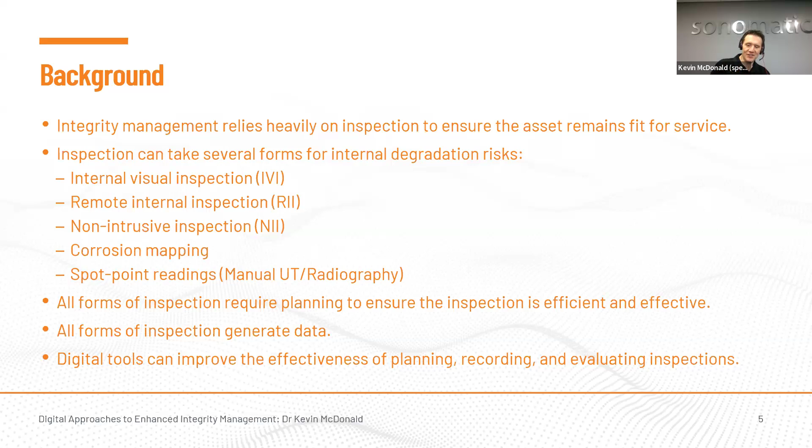From what we see, that often doesn't meet the needs of an inspection. It's that old cliche of not seeing the woods for the trees. There's just too much information thrown at you when you're looking at an entire asset twin. So therefore, we tend to focus on a mini twin for a single component to enhance inspection and integrity management.

Just an example of that. So I've got two examples here. One of a pressure vessel, one of a pipework circuit. Just the types of things we always create when we're doing any kind of inspection activity or inspection planning for that matter. So we've got a pressure vessel on the left, which has got some inspection data on it, and then on the right hand side there's a pipework circuit.

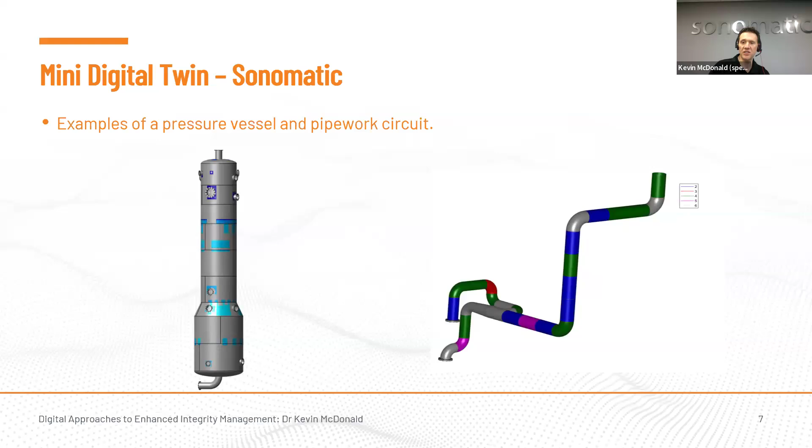The legend's perhaps not very easy to read, but this has been segregated into individual spot point measurement locations, and these have been coloured by the number of previous inspections that each of these has seen. So, for example, 4 is green. Anything that's grey has not seen any inspection at all on this particular circuit. But as I say, that's just an example of the types of models we do create, just as a flavour for the remainder of the talk.

So moving on to one of our specific topics on this. So first of all, I'm going to talk about NII, but I want to just make clear what I mean by that, because we still see that the terms NII and NDT are used quite interchangeably a lot in the inspection industry. So when I talk about NII, it's one of our core services, and it's a 4-stage process which is applied to pressure vessels with the aim of either deferring or replacing an internal visual inspection.

So I mentioned the 4 stages. So there's an assessment to determine if a vessel is suitable to have NII applied, which, as I said before, is just an externally applied inspection to verify the internal condition. Assuming the vessel is suitable, a work scope is then developed with a specific set of criteria that the inspection must meet, and the vessel is then inspected. And then finally, there's an evaluation phase, which will assess the inspection results to ensure the inspection criteria were met.

There is a recommended practice which has been written to govern this process. In essence, this was first published in 2007 by DNV. The latest version went live in February 2020. And as Neil mentioned at the start, I was one of the authors of that recommended practice.

So just as a slightly more expanded overview of what the process involves. As I said, there was an assessment phase initially, in which we will review the operating and design parameters of the pressure vessel and the inspection history to determine if it's suitable for NII. If that is the case, we would then define the key inspection requirements in terms of both coverage and the most representative locations for inspection of the vessel given the degradation risks, and also define the appropriate inspection techniques that are most suited for the vessel and the degradation risk associated with that.

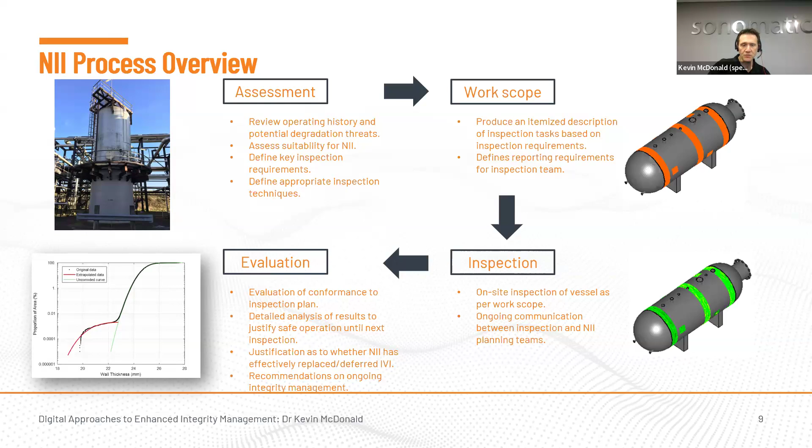So we've got an example here of the type of model that we'll produce of a vessel for doing an NII. 3D models are used throughout the whole process, primarily because of ease, efficiency, and consistency at all stages. We can just create the model, deploy it with the inspection team, and they hand it back to us once that inspection has been completed. It makes life so much easier for everybody.

In addition to that, NII does provide a cost-effective alternative, but can generate substantial amounts of data, particularly if it's a high coverage requirement for a vessel. I've got an example later in the presentation of a vessel that's got a lot of data on it, and you'll see just the sheer volume that is generated. And that all needs to be housed somewhere as well. So it's much easier to have it on a model so we can easily see where each scan has been completed, and it's much more simple for everybody in terms of visualization, particularly if there's any degradation that has been identified.

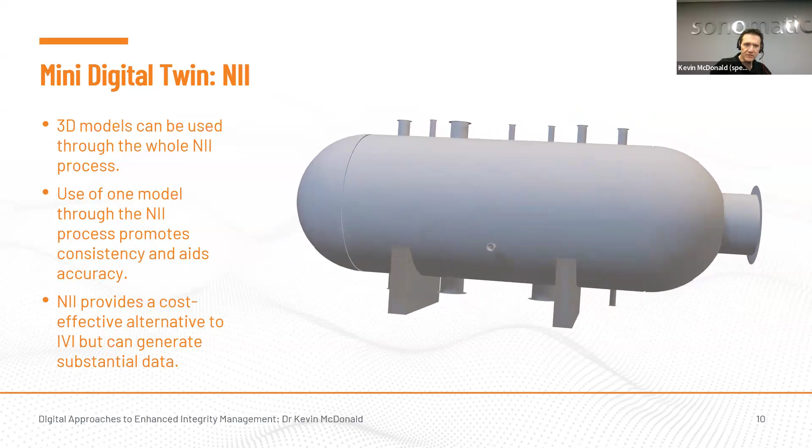But in terms of how these digital tools can aid efficiency of the NII process itself, I mentioned one of the things we do is review the inspection history. Within our digital tools, we can visualize that as a timeline, which, as daft as it sounds, can be a massive help for all stakeholders in terms of understanding exactly what the vessel has seen.

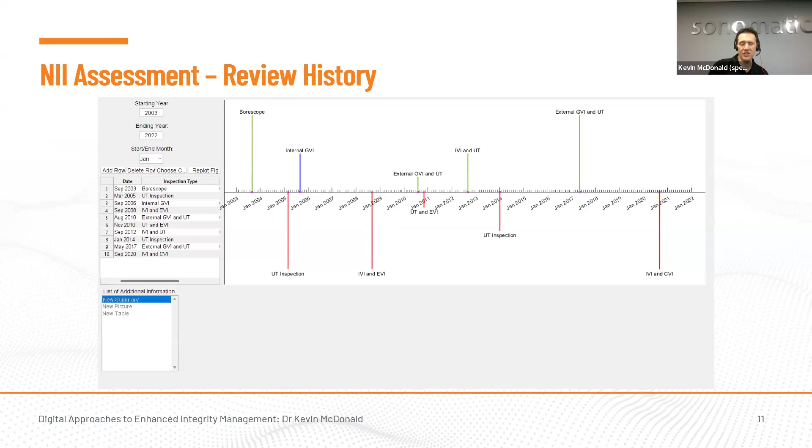In terms of previous inspection, that obviously doesn't just have to relate to pressure vessels. We can produce this for any component, but for the purposes of this example, this is an inspection history from a pressure vessel. So you can see there's been a number of different inspections. It's had some UT, internal visual inspections, borescope, for example. So it's just a much more simple and efficient way of representing the history in a single snapshot for all stakeholders to easily capture the overall picture.

We also use it to mark up the various zones of the vessel, primarily with an ease of reviewing the threats that are applicable. We can mark up the vessel in various zones in terms of what each zone is seeing. So for an example here, we've got liquid zone at the bottom, which is constantly wetted, which would be an area that would need to be targeted by inspection.

In addition, this vessel was also clad beyond a certain point, so we can mark up where the cladding is present too. That would require a slightly different inspection technique to be deployed, and may require slightly different coverage level too, depending on the specific cladding that's in place. But overall, the reason that we do this is just to, again, make life easier and everything clearer for everybody who's going to be involved in the NII process, both in terms of us and the client.

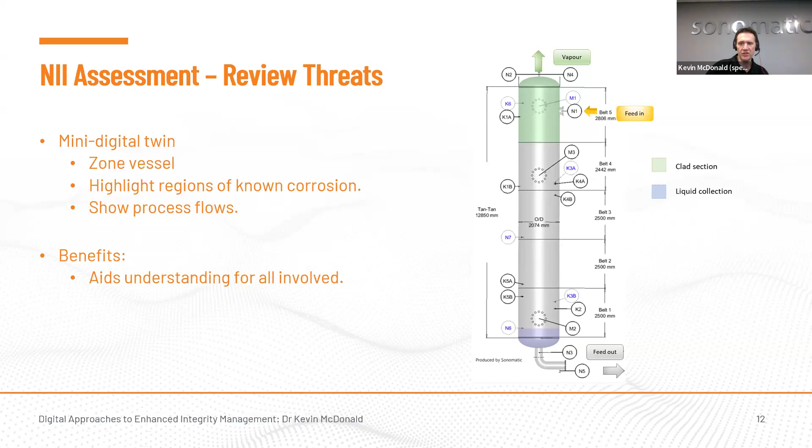And we can show the process flows, so that may highlight or guide us to where any areas of concern may be. Similarly, if there's any areas of known corrosion, these can also be marked up in a drawing such as this to, again, illustrate areas that we need to be targeted during an inspection campaign.

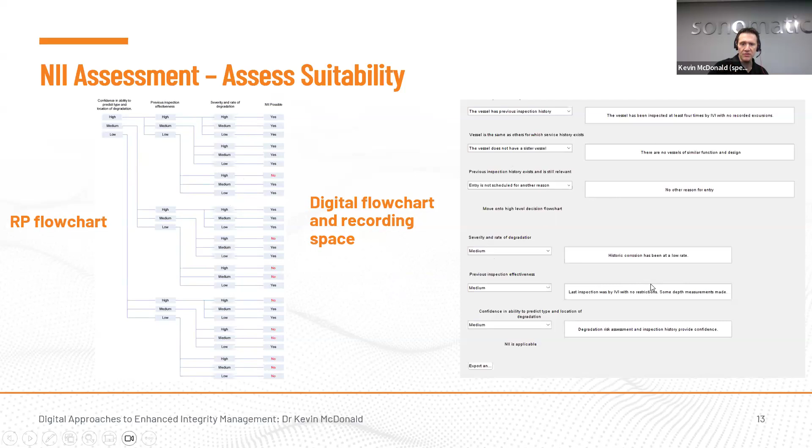I mentioned the work scope earlier, so moving on to that. So as I said, we try to be as detailed as we can when we're putting together work scopes, so that they're as clear as they can be to the inspection team. It is important that each item is achievable. Sometimes that isn't the case, but again, access when you get to a platform, for example, could be heavily restricted that we just don't know about. Maybe it wasn't captured in photographs, for example.

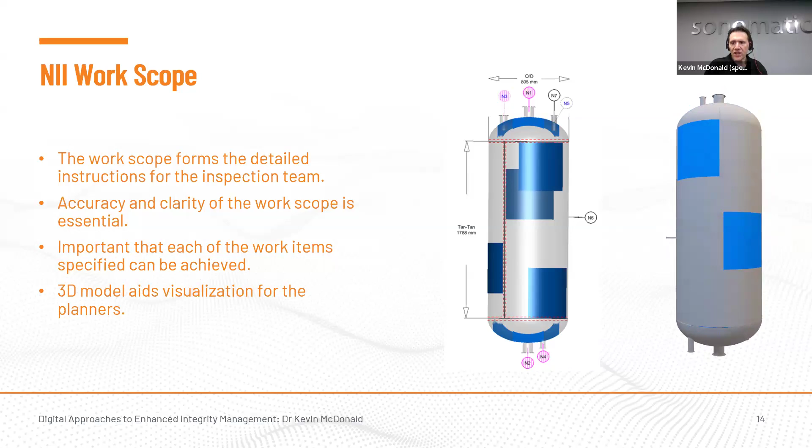But we would always mark up areas on a model to illustrate where the areas of inspection that we would like to see are located. As I say, there are times when those can't be captured for multiple reasons. But again, it's just a very good visual tool to represent the areas of inspection that are required, for both our side and the client side, because we can hand this over to the client who then can go off and say, for example, there's a walkway that hasn't been captured on the model that could be used to gain a higher elevation and therefore make life easier for the inspection team. Similarly, they could also tell us that access is heavily restricted at one location, and we need to consider an alternative.

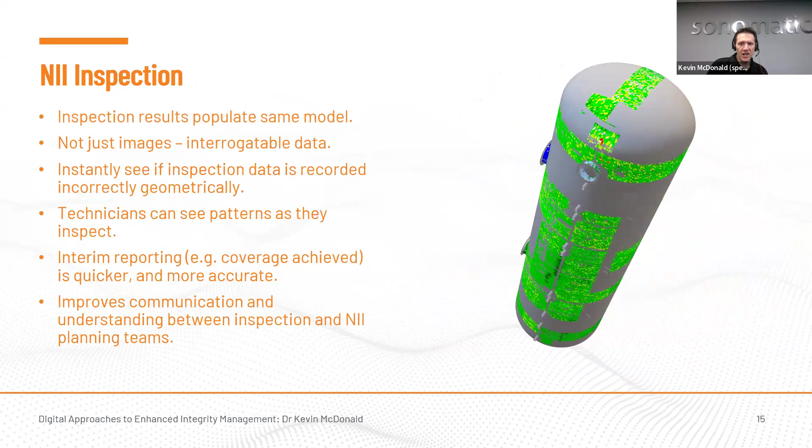So once the inspection team is deployed on site to perform the NII inspection, these inspection results will all be populated on the same model that was created in the initial stages during the assessment and work scope phases. One thing I do want to stress here is that the data that's uploaded onto our models isn't just composite images of numbers. It is interrogatable data. So in other words, it contains the waveform data that was captured during the inspection campaign. So anyone could go in and assess the data at any point to double check anything, for example, or if they would like to reanalyze it in more detail for whatever reason, that can be done. It's all done within our digital framework.

There's a number of additional benefits to that. So we can instantly see if inspection data is recorded incorrectly in terms of geometry. So for example, if you're inspecting around a nozzle, and that shows up somewhere that you weren't expecting it to when it's uploaded onto the model, that's very easy to change at that point. The technicians can also see patterns as they're inspecting. So if they see anything of concern, it's very easy to visualize that immediately, and they can make adjustments to the inspection area immediately if necessary. It makes life much easier and quicker for interim reporting.

So in other words, just specifying what coverage has been achieved and any initial minimums that have been found. I say initial because we do provide interim reports while the technicians are on site, but they're just indicative values; they're not fully confirmed until they've done a full in-depth data analysis once they're back on shore.

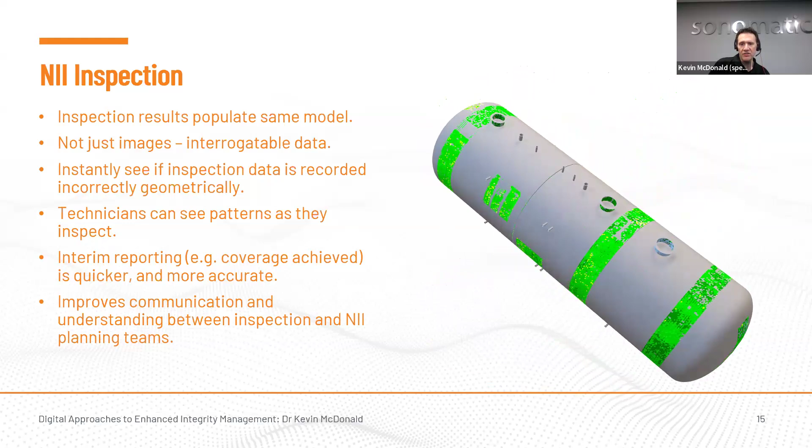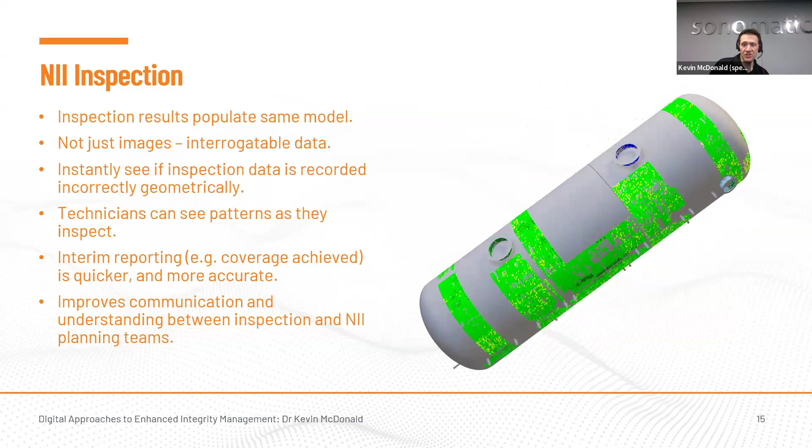And finally, I see improved communication. It helps communication and understanding between the various teams, primarily because if the inspection team finds something, they can very easily just point it out to us on this model. Similarly, if they get on site and they discover that they can't inspect a certain area for reasons that weren't picked up in advance, for example, maybe the surface is worse than initially thought, they can again just specify this is an area that we cannot get, and they can suggest an alternative, or we can suggest an alternative and move it for them. Again, just to make everything more efficient for everyone.

So finally, the evaluation phase. It's one that's often forgotten. Very often clients do it themselves, but this is a very important phase to the NII process because it's the justification of not doing the internal visual inspection, or rather, it's the justification of using the results you have got in lieu of your internal visual inspection.

So what the NII evaluation will do is review the conformance to the initial inspection plan in terms of: was the correct coverage achieved, were the correct locations achieved? If they weren't, were suitable alternatives taken instead, and was the correct inspection technique achieved? And what I mean by that is, was a technique with a suitable probability of detection used? And if not, how large was the difference? With a view to doing a detailed analysis to justify operation until the next inspection.

So in other words, whether or not the NII has effectively replaced or deferred the internal visual inspection or not, as the case would be, which does happen sometimes. And again, as I mentioned earlier, we can also make recommendations in terms of ongoing integrity management that may be required.

So the crucial thing here is the digital twin, again, just makes the data analysis quicker and more efficient. The inspection data, as I've shown in previous slides, is all uploaded onto the 3D model. We use all the data from the inspection campaign. We don't just look at minimum values. We can also collect data from different zones. So, for example, as I mentioned earlier, if there's a liquid zone in a vessel which is showing behavior markedly different to the remainder of it, we can very easily just gather those scans together and treat them in isolation, in effect, because they're behaving differently.

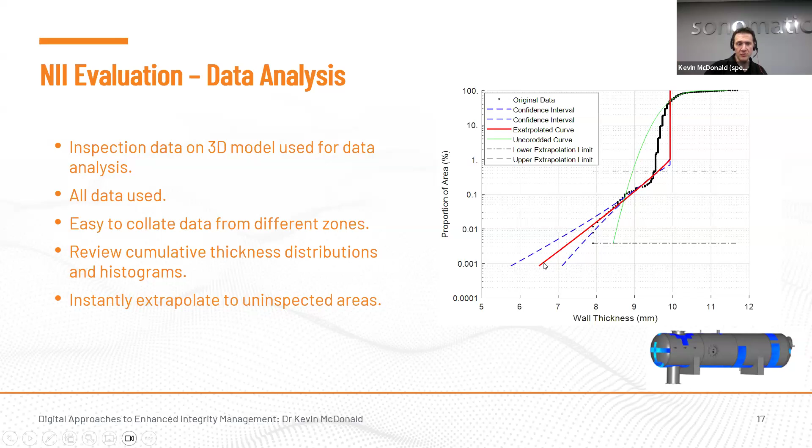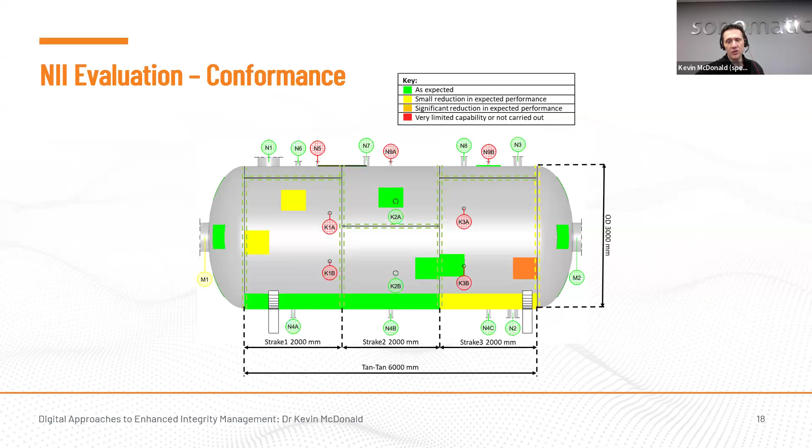And as I say, the use of a digital tool just provides a very quick, easy overview for everybody, all the stakeholders involved, of the overall outcome of the inspection campaign.

I've got a video / GIF here just to illustrate how we have a software that, in essence, pulls all those stages together. The software is called SIMS, which stands for Sonomatic Integrity Management Software. So in the top right here, you've got a number of components for the vessel. So there's several strakes, there's domes, there's nozzles, there's supports here, which are listed too.

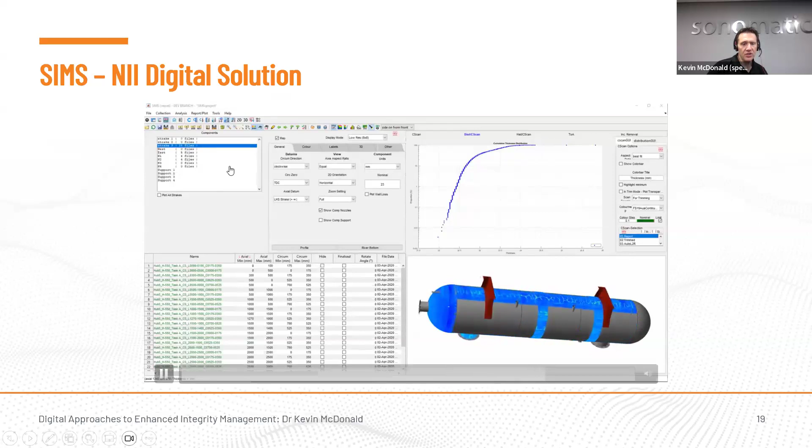So we can swap between each of these, and then in the bottom left, these are all the data files for that single strake. They are at a specified location in terms of an axial and circumferential position. If I was to scroll right, which I can't, you can also see the minimums that are associated with those, and a number of other parameters as well. And then there's also thickness distribution shown in the top right.

Again, this is just to illustrate how the data is behaving. This is much more what's called a normal distribution, for anyone who doesn't know what these represent. So it's a much more smooth reducing curve, and that's a very classic sign that corrosion is absent from the sample. The reason this is included is because, if it's behaving in a manner like the plot I showed previously, it's a very easy way to spot something different happening within an inspection data sample.

So in other words, if corrosion is present and perhaps not being seen due to choice of color scale, or it could be quite isolated. On a large vessel, it's very difficult to spot a small pit with the naked eye, but in terms of how it can be visualized using a distribution such as this, it's very easy to represent that.

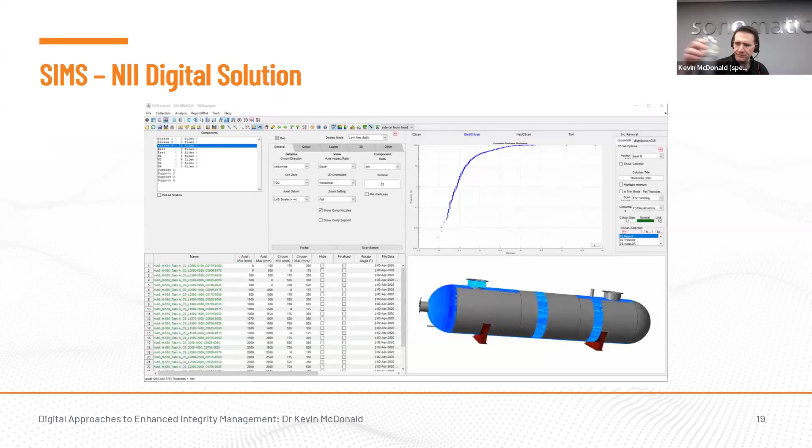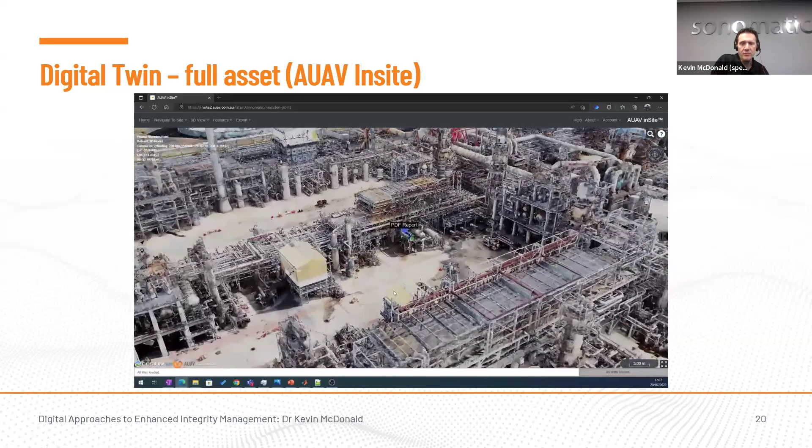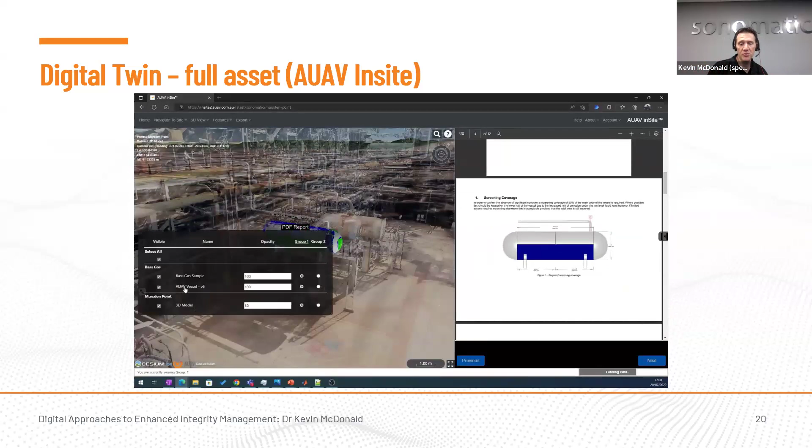Before I move on from pressure vessels, I mentioned at the start we tend not to consider a full asset model, but I just wanted to illustrate this before we move on. One of the sister companies owned by our parent company is a company called AUAV, who are essentially a drone inspection company. They can take a series of photographs and stitch those together to produce an entire asset model. We can tie into that using a platform called Insite, which is AUAV-specific software, to superimpose various things on a pressure vessel model within that platform.

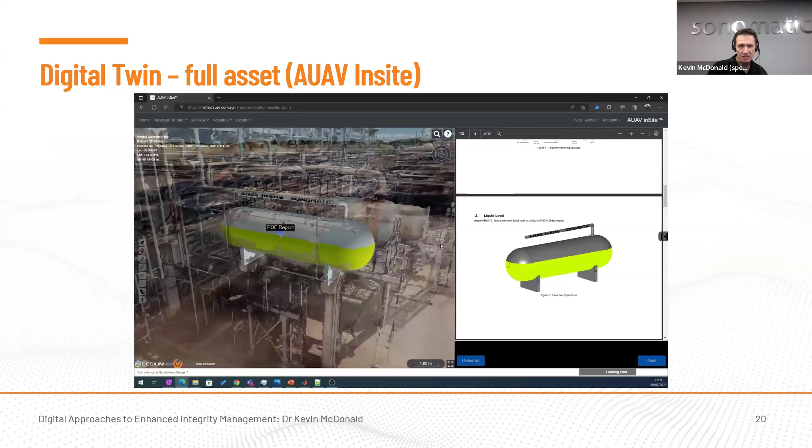So at the start, there was inspection data, which is overlaid. Now it's been swapped to the inspection work scope. And now this is the liquid level of the vessel. And on the right-hand side, you'll see there's also an inspection report which has been tagged to this vessel, which can be navigated and viewed alongside the vessel in this platform too. And there is a statistical distribution included in that report.

Beyond that, we can essentially flatten the photographs to view the model in isolation. What's being shown on the screen at the moment is adding a particular area of interest and making comments associated with that too. So, for example, if there's an area of pitting we want to highlight, we can mark that up on the model and make comments to that effect. We can also append PDF reports or images to this too.

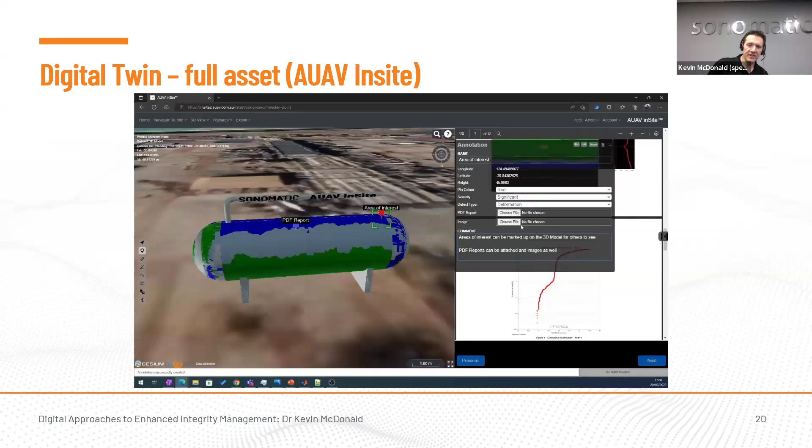And then finally, what it's about to show here is we can also add measurements to the vessel. So if there's an area of pitting, we could just add a measurement to that. What's going to be shown here is just the overall tan-to-tan length of the vessel. But again, it just serves to illustrate that we can also append the model further with other relevant pieces of information. And from memory, that's where the video ends. Yes.

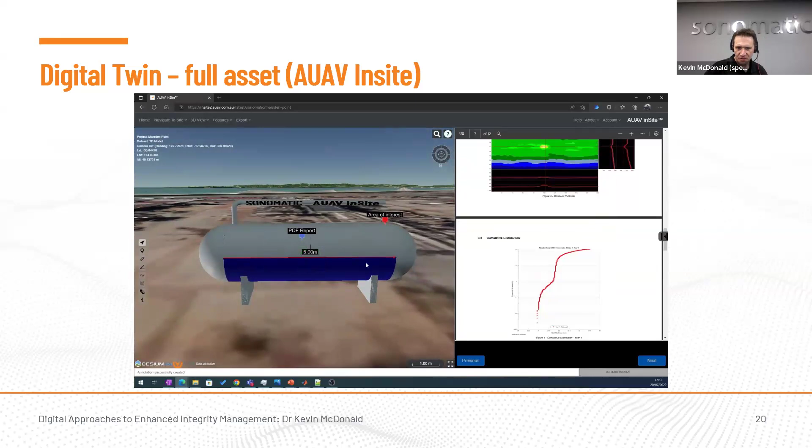So moving on now to pipework data trending. I mentioned at the start, I gave a presentation 2 years ago on our data trending methodology. I won't cover it again here; I won't bore everyone with it again. But as a very brief overview, we have developed a methodology for trending on spot point pipework readings, primarily because we accept that measurement error will happen over time. So trending over a longer term mitigates that as far as possible.

It also gives recognition to the statistical sampling principles at play when any kind of inspection, particularly low coverage pipework inspection such as this, is taking place. So it's basically taking what you feel is a representative sample of a pipework circuit and making decisions based on that. The differentiator in terms of what we do is we can identify groups of points within a pipework circuit that are behaving in a similar manner.

So, for example, if dead legs are behaving one way and thicker materials behaving another, we can very easily treat those in isolation and come up with tailored approaches for each of those groupings.

We also use information on historic corrosion coverage, in other words, how widespread corroded material has been in the past, all with a view to producing more representative corrosion rates, either for a pipework circuit as a whole or for various subgroupings within a pipework circuit, with a view to feeding that into a more efficient inspection planning process. Are areas being over or under inspected? Should some be seeing more focus than others, for example?

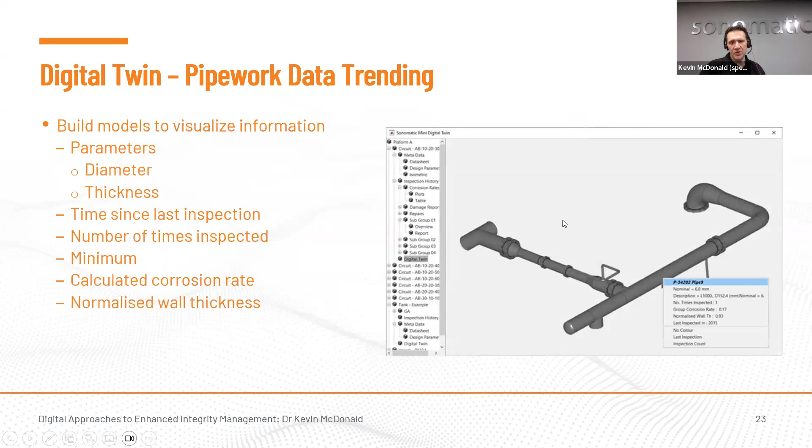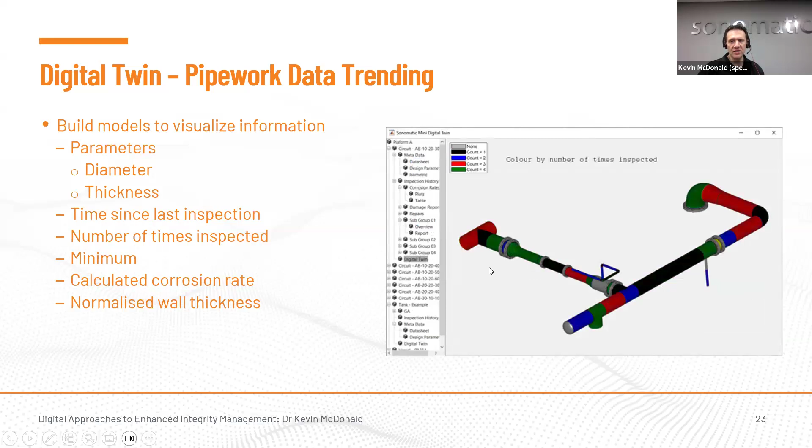As these things jump around, you'll see the part of the tree that's being highlighted jump around, and you'll see pressure vessels and other pieces of inspection information within this too. But as I say, it just serves to illustrate the ease with which we can navigate through this using a digital format. Again, just to make general understanding much more efficient.

So moving on now to data processing and management. When we do an inspection, a digital twin will house all of our inspection data. We've got a number of algorithms and other additional features to aid in data processing in order to deliver maximum value from inspection campaigns. I mentioned a number at the start here.

Corrosion detection, in other words, algorithms can determine external versus internal corrosion. I mentioned all these already, but coating correction, batch processing, automated reporting, and additional analytics. I'm going to cover each of these in a little bit more depth now, just as a larger illustration as to how this all hangs together.

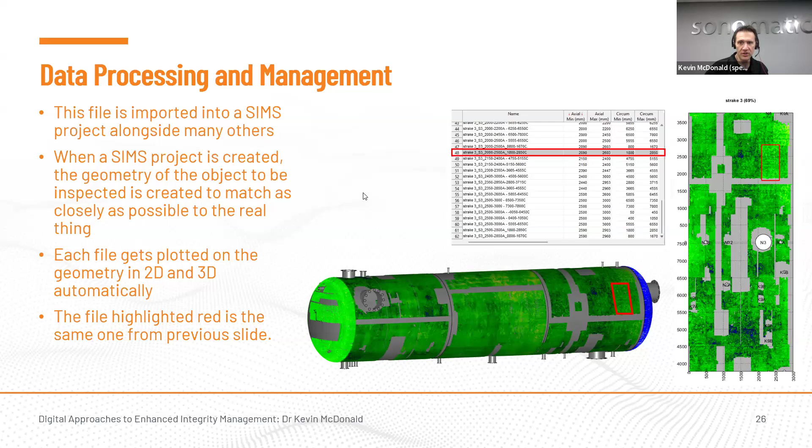So, for example, you can see there's a number of different areas missing on this vessel. This was due to walkways, and then there was an obstruction on the end here, for example. But again, this is just how the data is housed before and during processing stages.

So when processing on the previous slide, in other words, when we're performing an exercise such as this, we do have algorithms which will search. I jumped back a little quickly, but it does say, as I've said, from left to right and from right to left. So in other words, our algorithms will search along this direction and in this direction just to search for any very subtle changes in the signal response, because that can give a very good indication, particularly in the interface signal, which is the first one, of how the degradation manifests in terms of internal versus external corrosion.

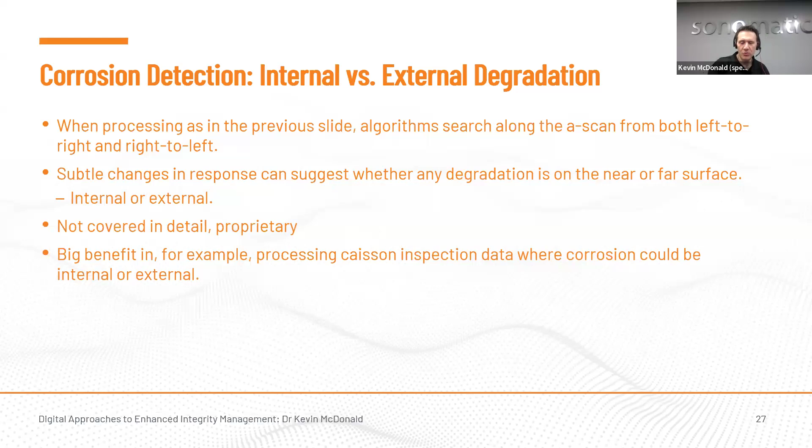I can't say exactly how it works, partly because it's proprietary, secondly because I'm not software savvy enough to explain it in enough technical detail. But we have been asked, well, what's the point if you should see if there's external corrosion versus internal corrosion? While that is fair, a lot of the time we do, for example, caisson inspections where we can't see the external surface. We're just sending a tool down a pipe. So in that case, that does become much more valuable, and also in, for example, subsea inspections, we can make a much more informed opinion, I guess, on whether degradation was internal or external.

So our algorithms can also account for varying coating thicknesses between repeat inspections. Generally, that can be processed out. Sometimes it can't be. And I've got this best illustrated with an example, which I'll come to in a second. But the reason for this is to calculate the most accurate growth rates, again, for input into integrity management decisions. Because sometimes, for example, in the example I've got, it could have resulted in a larger headache than was necessary for the client. But just to set the scene for this example.

So there was a repeat inspection done by a third party on a critical item, which had significant internal corrosion, and the requirement was to determine whether corrosion was indeed active or not. Between the two inspections, new internal coating had been applied, which meant the repeat inspection resulted in significantly thicker readings. The client asked the inspection company to comment on that, and they said they had processed the coating out and therefore couldn't understand why the readings were thicker. To be blunt, the client didn't believe them, so they asked us to investigate to see what our thoughts were in terms of the variation between the two inspection campaigns.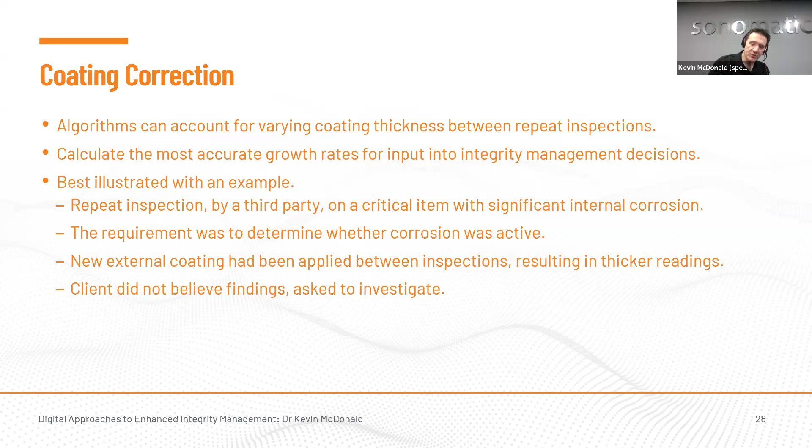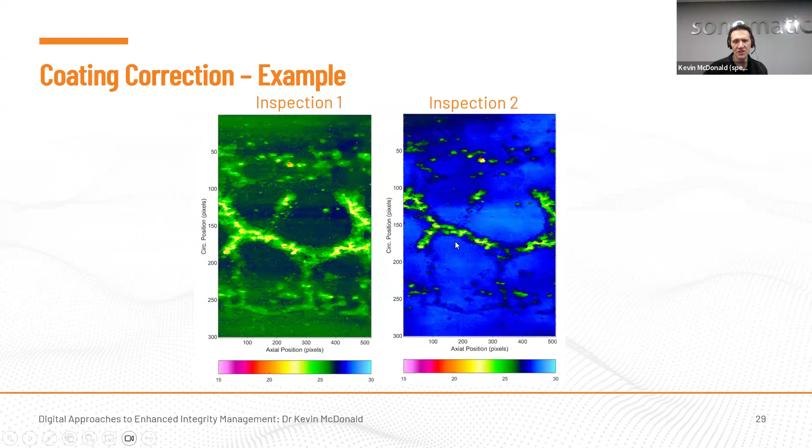So I've got an image now just to illustrate the variance between the two. The image on the left hand side comes from the first inspection, and on the right hand side comes from the second. These are on the same color scale, but you can see that the data on the right hand side is shown up as much thicker than the data on the left, but the pattern of corroded material is almost identical. So it just seems to be that the thickness readings are the issue here.

So I mentioned slightly earlier how UT thicknesses are calculated. So just to go over that in slightly more detail. There's multiple responses from a UT, but there's 3 that are important for these purposes: the interface signal, which is the first response, the first back wall, and the second back wall. So if I just jump back a little bit, the interface signal is this one. The first back wall is the one in the middle, and the second back wall is the one on the right.

So our software can produce, in effect, 2 maps associated with this: the interface to first back wall map, and also the first to second back wall map. The first to second back wall map is traditionally what you'll see in a composite image, and the interface to first back wall is sometimes used, but it's much less common. However, if we take the difference between these 2 maps, we can essentially see what is a coating correction map. So again, just to use our example here to illustrate that point.

So having reprocessed the data, we were handed over data files, CSVs of the data for this inspection. So we produced an interface to first back wall map, and then the first to second back wall map. And on the right hand side, that is the difference between the 2 maps.

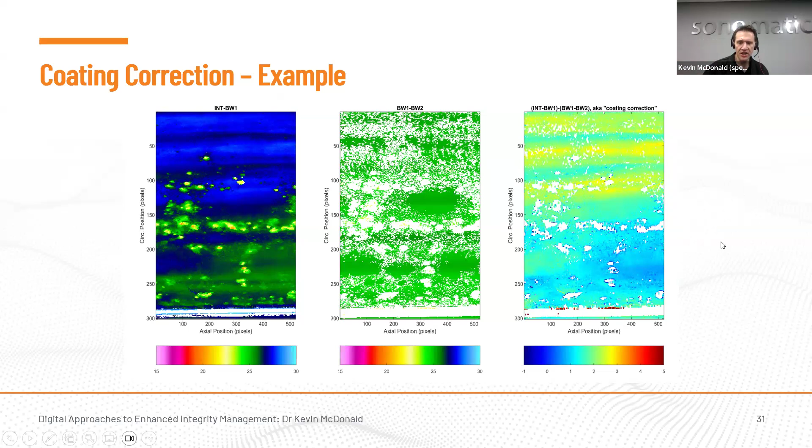You'll notice a lot of missing data on the middle and the right hand images. Now we knew that the coating was new and therefore very smooth, so it shouldn't have had any deviations or missing data as a result of that. So we used interpolation and extrapolation to essentially fill in the gaps of this coating map and produce what was called a filled coating correction map.

That was then applied to both campaigns, just to get the best like-for-like comparison that we could. You can see the overall outcome on both images, top and bottom, on the right hand side. So this was from the first inspection campaign, and this is from the second inspection campaign. So we were able to prove that there was essentially nothing going on in terms of active corrosion at this location.

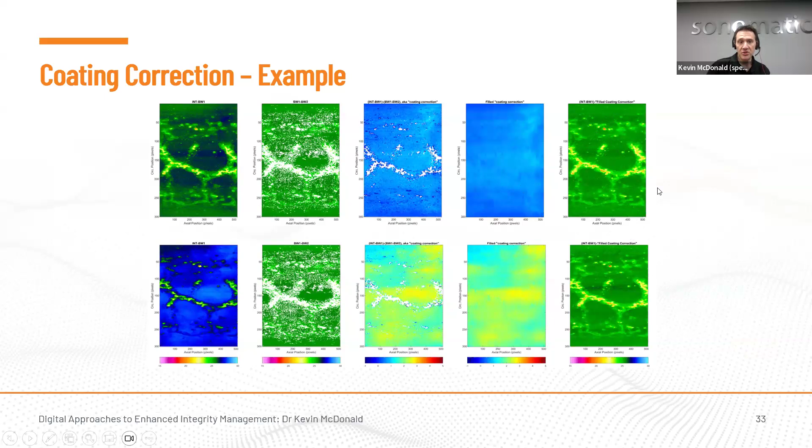And that was just one scan file in, I can't remember exactly how many, but this one a slug catcher, so it was quite an extensive inspection that was done. So this process was repeated for multiple inspection scans. This was the worst case, and again, I thought was a good example to illustrate that point here.

So moving on to the batch processing capability within our digital tools. So this was motivated by an inspection that we'd done, which we won an award for, our sister companies along with ourselves, and produced a new technique for inspection of cargo oil tanks and FPSOs. We won the Joint Venture Technology Award at Subsea Expo last year, and also the Innovation and Technology Award at the Subsea Business Awards in Australia.

So this was a replacement of essentially a visual inspection of an FPSO cargo oil tank with a UT method, which generated a much larger volume of data, approximately 55,000 times more data than had been generated in previous inspection campaigns. I think we ended up with approximately 120 million data points from this inspection campaign.

So given that volume of data, we had to develop much more efficient methods of batch processing in order just to get the reporting done on time and just make everything more efficient. So again, that was all housed within a digital twin. So due to the large volume of data, there was in effect a first pass analysis that was automated. This would just look at each file and say, essentially, is there something here that needs to be looked at or not? That's essentially how it was done, as an initial sort of screening, if you like.

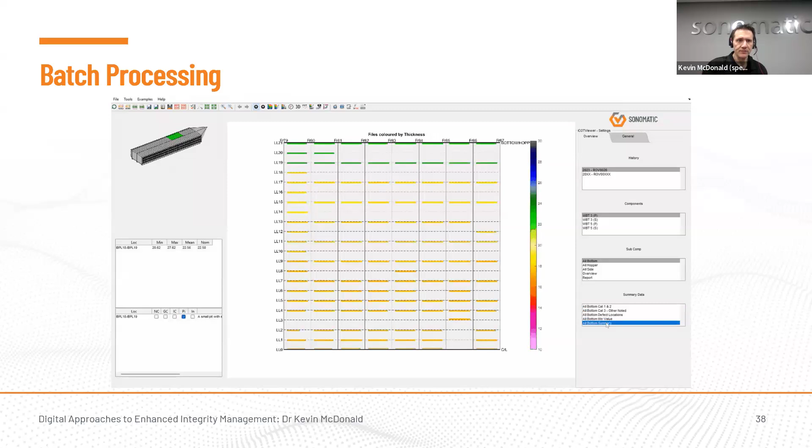I also mentioned automated reporting. So given again the sheer volume of data, we had to automate our reports, because it was easier to spit them out rather than go through a process of building a Word document for each one. So given everything that was done in the automated processing stages, all that was pulled through into an automated report at the end. So each tank had approximately 275 scan files, and there were 1,102 files altogether.

So these were pulled into what you've seen here, essentially what was called a one-page summary, which was what the client wanted of each of these particular files. So you've got just the file stats, in other words, the name, location, the nominal thickness, the minimum that was recorded. It's highlighted within this grid to show exactly where on this component that file was taken. There's a defect classification, if there is any, so internal, undefined, external, for example.

The thickness map will show that particular scan file, and also essentially all other files close to it, and how it fits into the bigger picture. And finally, any reports that were made against that particular file also carried through into the automated report.

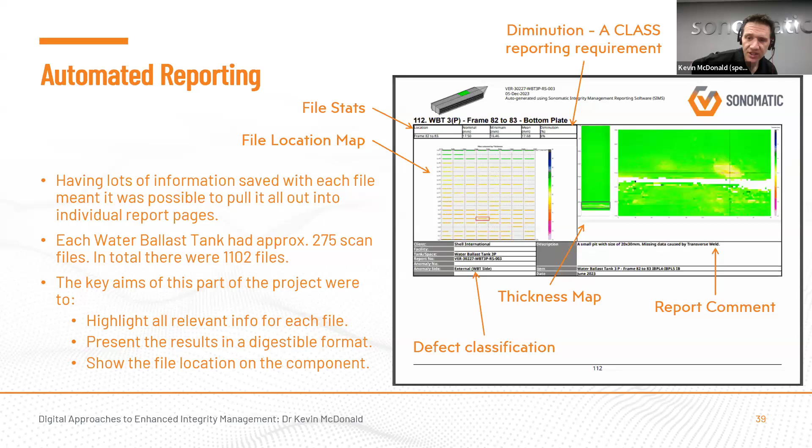So I should have mentioned this diminution, which was a class reporting requirement, was added too. So it's just a yes or no. Is there any diminution present within that? That was required for the class society, which looks after the shipping accreditation. They required that to be included in the reports.

So we could also generate a second report for any specific file that was of particular interest. We could have more focus on the minimum thickness and a profile of the wall thickness. It's maybe not that easy to see in this image, but there's a profile plot, so you can just about see here the profile running through the horizontal and vertical slices.

You'll see that there's much more variation at the right-hand side here, where you go over this area of corrosion. And again, similarly in the vertical slice, it's probably more visible there. You can just see the vertical profile as you move through the sample size, and then there's a drop off as you cover that area of corrosion. So again, just a much quicker and easier way to represent various different aspects.

We could, in addition to this, split up areas with different nominal thickness, because very often we would cover an area where two plates of different nominal thickness have been bolted together. So we could again split those up if necessary and produce separate reports for each of those.

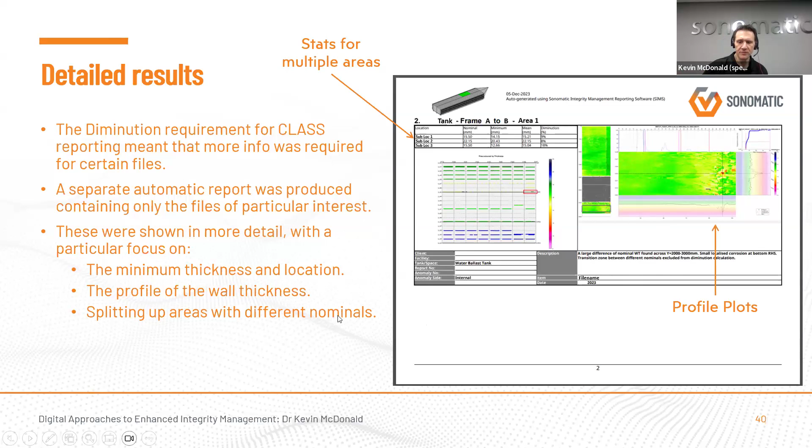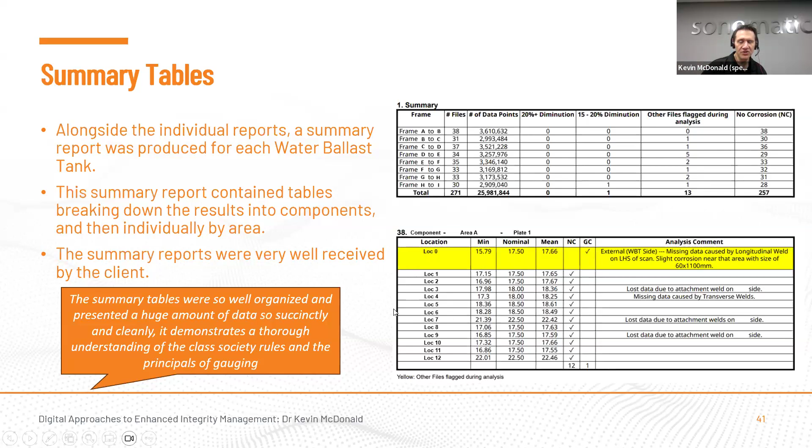Just quantify any changes between the inspections in terms of growth, as I say, in terms of either axial or circumferential extent or depth. We can trend on any individual defects. So if there's 1 or 2 that are of particular concern, we could isolate those and see if they're behaving differently to the inspection sample more generally.

We can also export these corrosion maps into the cumulative thickness distributions that I showed earlier to perform a more detailed statistical comparison, be that either comparing the thickness distributions directly, or we could perform a more in-depth statistical analysis, which would be driven by the data. But some things we can do are nearest neighbour comparisons, point-to-point comparisons. We can do Bayesian analysis, we do regression of the various different things.

So that is a whole different presentation itself, which I'm not going to cover here. But as I say, just to give an additional flavour for the types of stuff that we can do with repeat inspection campaigns.

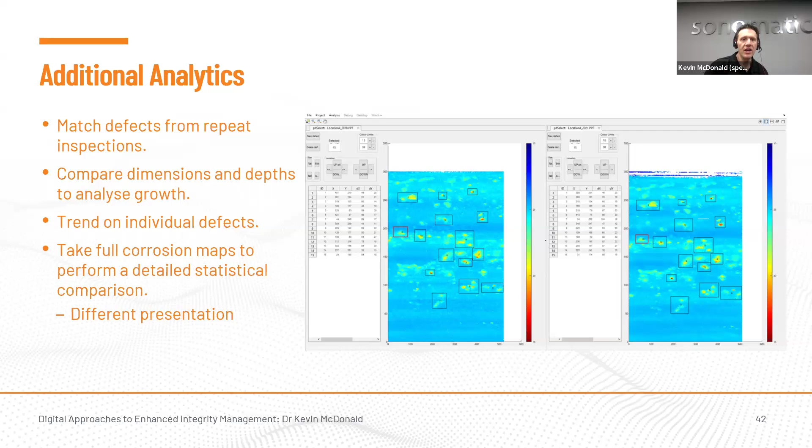Okay for time. But just as a summary now, digital tools will improve consistency, accuracy, understanding, repeatability, and decision outcomes for inspection campaigns, just due to the ease of housing all the data and visualizing it for everyone. There are a number of digital solutions that can be developed and deployed, including 3D mini twins, digitized flow charts and calculations, batch and automated reporting. I hope I've shown that the level of integration can be quite simple and also complex tools.

And then finally, digital tools will facilitate, one, a detailed analysis of inspection data, critical to integrated decision making. So in other words, deriving maximum value from your data. And secondly, I think it also recognises a more general point that there seems to be a growing need for data analytics capability in integrity teams, given the vast volume of data being generated now, and the increasing interest in making better use of that data.

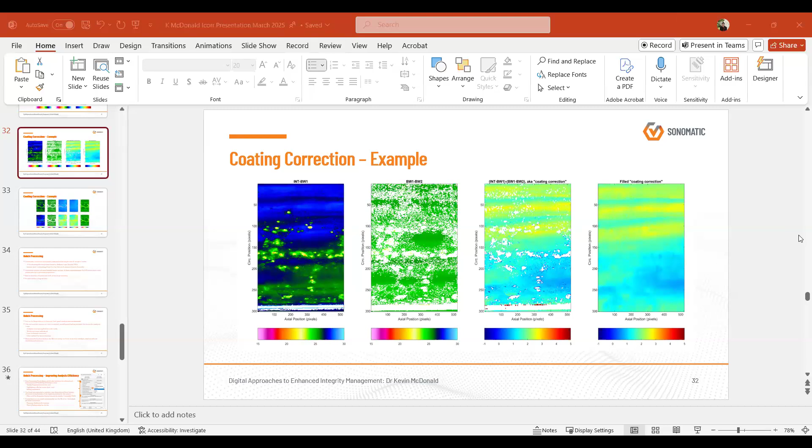Got another question just asking, how long does it take to prep for a digital twin driven inspection? We can build a digital twin. Well, the models we showed, for example, for a pressure vessel, we can generally build those in a few minutes. Again, with pipework circuits too, they're generally very quick to build. The only times these sometimes take a little bit longer is if you've got a vessel that's got a lot of nozzles on it, or if it's a particularly unusual shape.

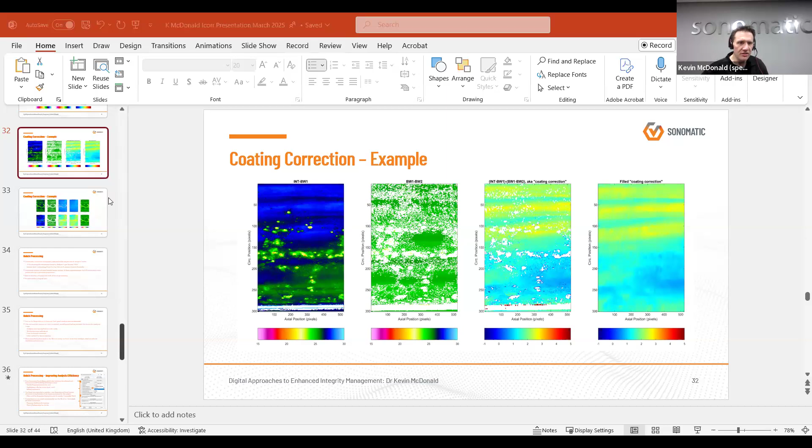The one I showed at the start had a tapered section. So this one was slightly more awkward to build because of the taper section. You get vessels that have, for example, boot sections, which again can be a little more complicated. But in general, half an hour at most to build a model like this. That's then handed over to the inspection team. I assume that's what the question relates to. If it's prep work for the actual physical inspection, to be honest, I don't know.

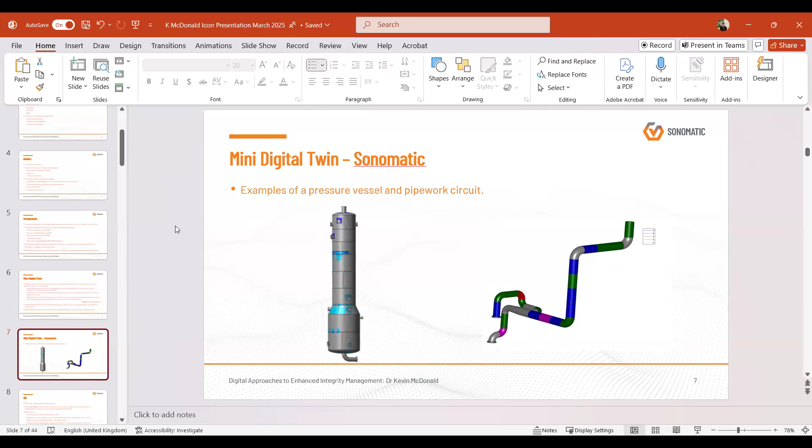Okay. And the final question is, how do you ensure data integrity and reliability in digital inspections? When data has been collected by the inspection teams, they are constantly feeding data back to us, so we can essentially screen it for quality. And if it's particularly noisy or if there's a lot of missing areas, we would ask them to repeat that area. So data is in effect continually screened when it's being collected.